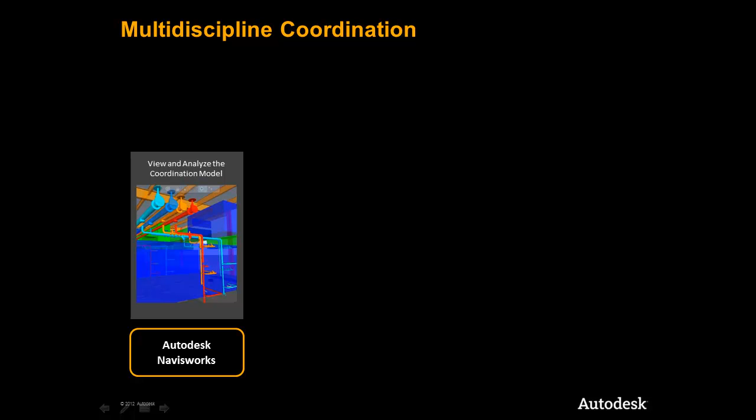We can easily and quickly view the multidiscipline models to see if there are any obvious problems, then move into using analytical tools to find specific clashes.

An important aspect of the Autodesk construction solution is not just the ability to find the clashes and conflicts within our project, but to manage and ultimately resolve them.

With this next phase of the workflow, we will explore Autodesk Navisworks' ability to quickly clash our models and to manage the information efficiently so we can reduce waste, requests for information, and change orders in the field.

With the conflicts found, we will continue in Navisworks to manage the who and what part of the process to assign the conflicts found to the appropriate stakeholders.

We will also take advantage of Autodesk Revit to ultimately make the changes to the design in order to resolve the problems virtually before we get into the field, where conflicts and mistakes have the largest impact on our project schedules and costs.

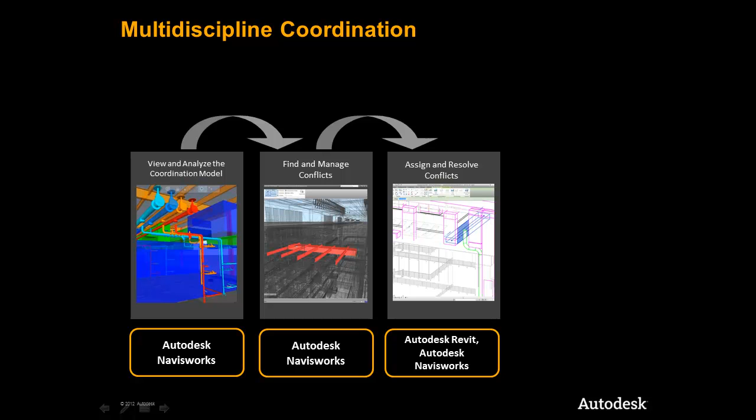The entire process can be tracked with powerful reporting tools that will ensure we have accurate and timely records of who did what, when they did it, and why.

To that end, we will show how the Autodesk Construction Solution creates detailed reports of the conflict analysis, including the tracking of problems found through to resolution.

It is important to note that the Autodesk Construction Solution ties directly into a data management and collaboration solution that empowers firms like yours to manage, share, and securely collaborate with all project stakeholders, both inside and outside your firewall.

As we see in this graphic, the Autodesk Data Management and Collaboration Solution is a connector that links the workflow components together, enabling project information to be shared at any stage of the process.

Undertaking pre-construction coordination across all trades offers the best opportunity to understand constructability before work begins in the field, and to help avoid preventable RFIs and change orders that can risk project schedules and budget.

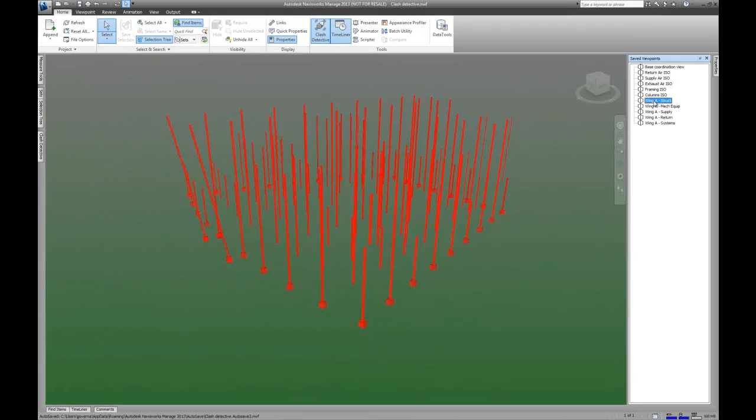Constructability models from each trade can be integrated into a single multidiscipline project model, regardless of authoring application. This is a key step to being able to coordinate these disciplines.

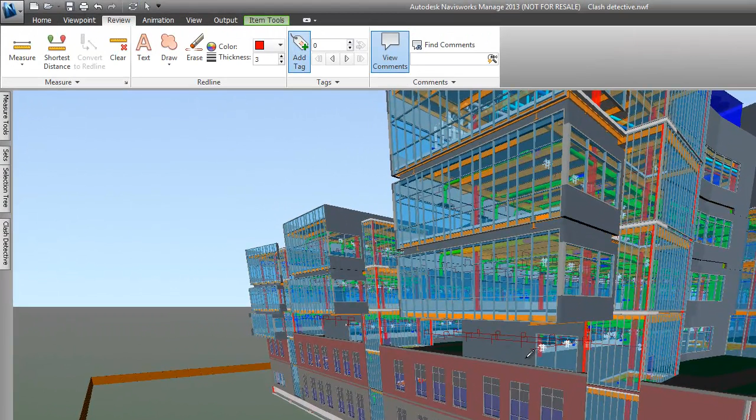By leveraging the constructability model, we can get a whole project view of the coordination issues at hand and begin to take steps to eliminate them by taking advantage of the work already done to create a model with construction intent. Here we can see that just a visual check shows there is a problem with the sprinkler system.

We see part of the system outside of the building envelope. We can make a note of the problem that is shared with all project stakeholders and can be assigned to the appropriate party for resolution.

The traditional coordination method involving overlaying 2D drawings on a light table is extremely time-consuming and unsurprisingly prone to many conflicts going undetected until encountered in the field.

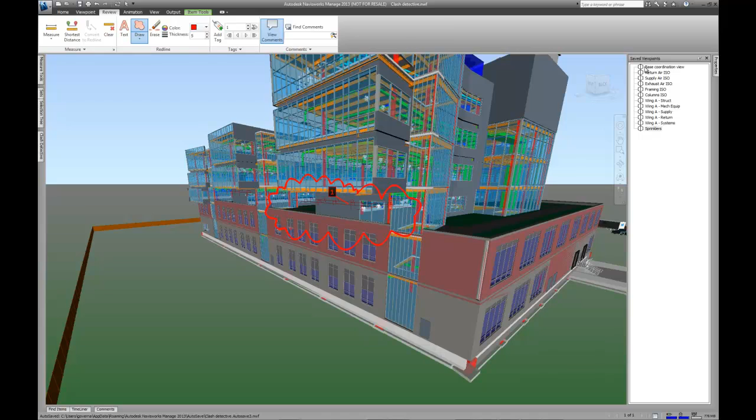When you bring together design data that has largely been developed in isolation, issues can be expected. While coordination practices currently exist using 2D paper drawings, using a model-based approach enables a more efficient and robust digital process where you can visually see the issues.

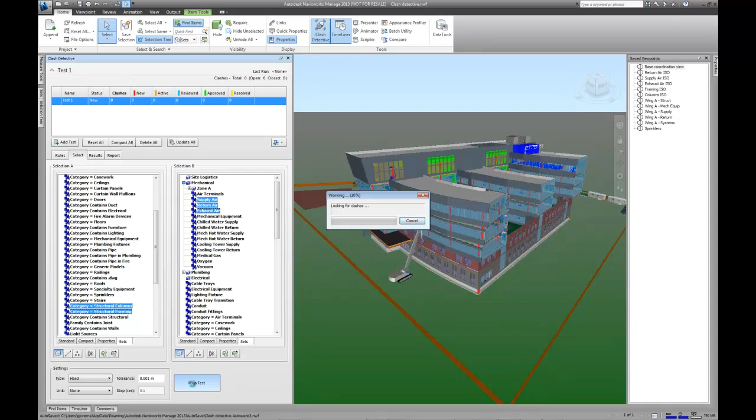The project model can then be analyzed for cross-discipline interferences, be they conflicts with HVAC systems and the steel structure, or inadequate clearances around the fire protection sprinklers.

Here we can see that a macro-level clashing of the systems and project components can be done. We can also follow our work breakdown instructions and leverage the area and zone schemes established for executing the work.

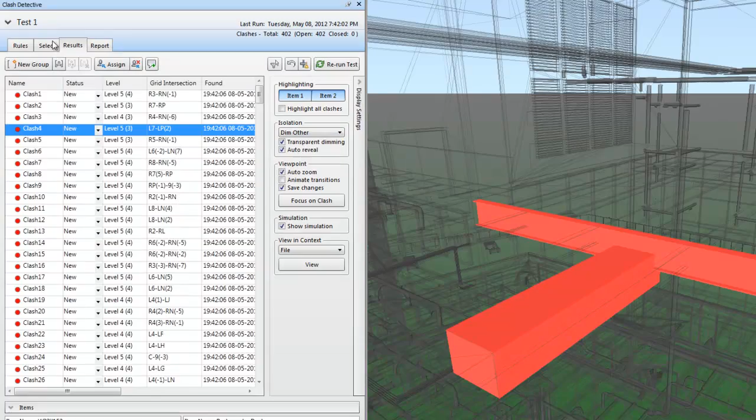We see how issues can be visualized more clearly, reviewed in a collaborative way, and assigned for follow-up actions. Once a whole project view is understood, we can then move into a micro-level coordination, where we leverage detailed views

of the model and get very specific on which elements are coordinated, and that the coordination is done in a logical and deliberate way, ensuring accuracy.

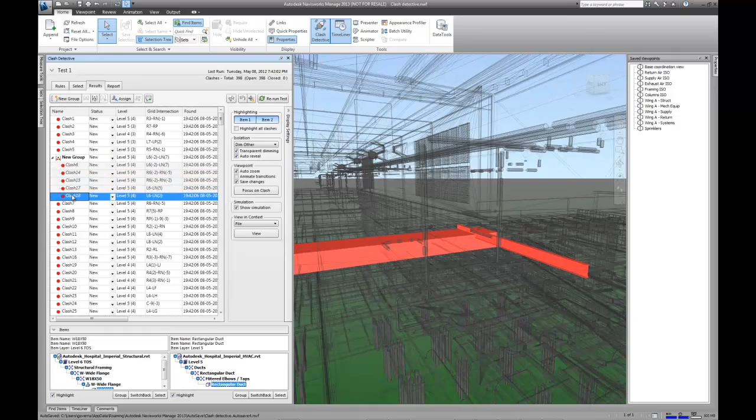The results of micro-level coordination will carry through to the field execution when daily or weekly coordination meetings and tasks are done using the framework and organization of the models done here in the multidiscipline coordination.

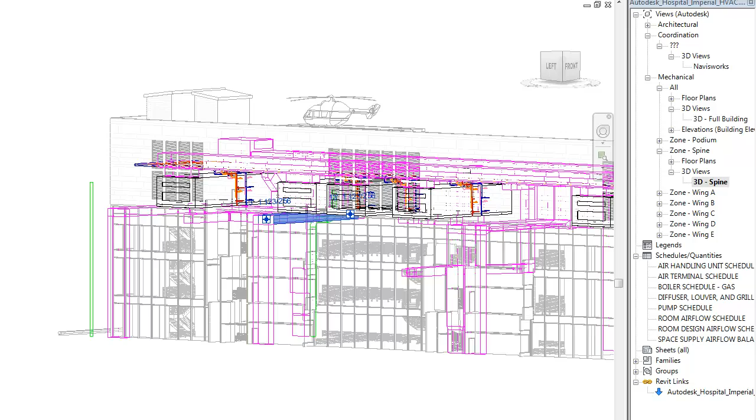As the issues are identified and managed, coordinating the needs and changes with the design or construction models are made easy with tools that group similar conflicts together, review in both 3D and 2D, and can switch between the single construction model and the originating design model.

Here we see that we easily group clashes for one building component together, assign them to the appropriate stakeholder, and easily switch to the design application where the conflict can be resolved accordingly. This saves time in locating the conflicts and ultimately streamlines the workflow for resolving them.

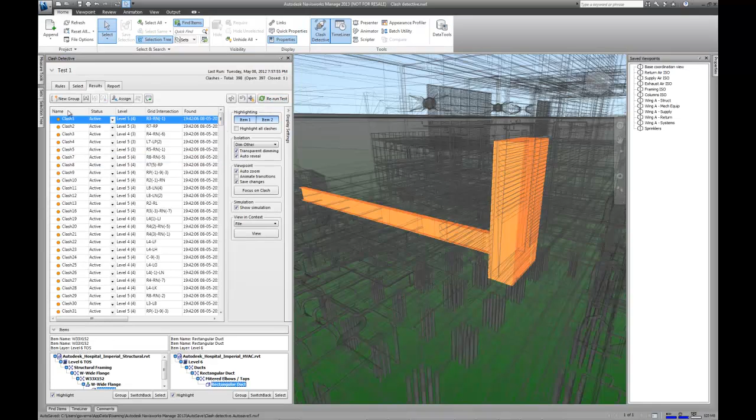We can also collaborate with distributed teams by sharing the relevant information in a controlled and secure environment, leveraging the Autodesk Collaboration and Data Management solution. This enables easy communication of issues and synchronization of subsequent changes across the many team members and locations.

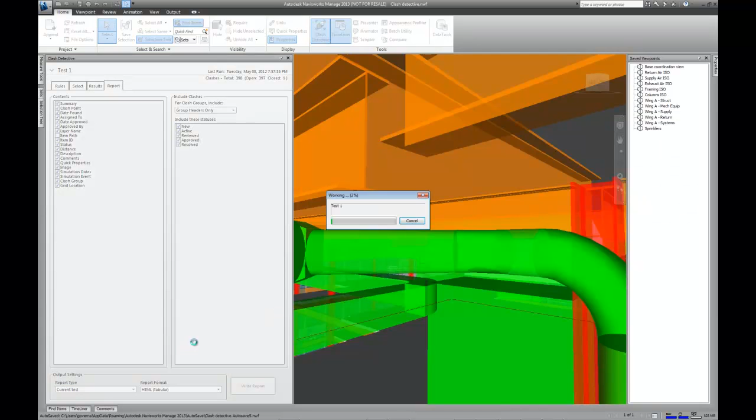Using the Autodesk construction solution and a model-based approach for coordination and analysis for multiple disciplines helps determine whether the various designs fit together and provides the opportunity to resolve any conflicts during the planning phases when there are no materials, equipment, or field labor costs involved.

The Autodesk construction solution provides a powerful and consistent framework to coordinate all disciplines involved in the BIM construction workflow that leverages an open platform to ensure all the appropriate project information is available throughout the entire coordination workflow.